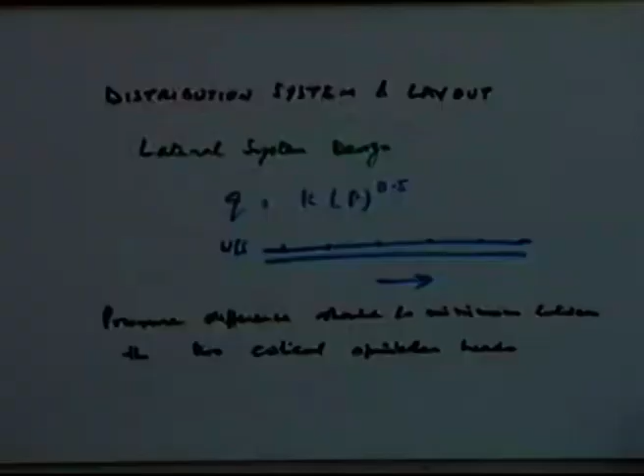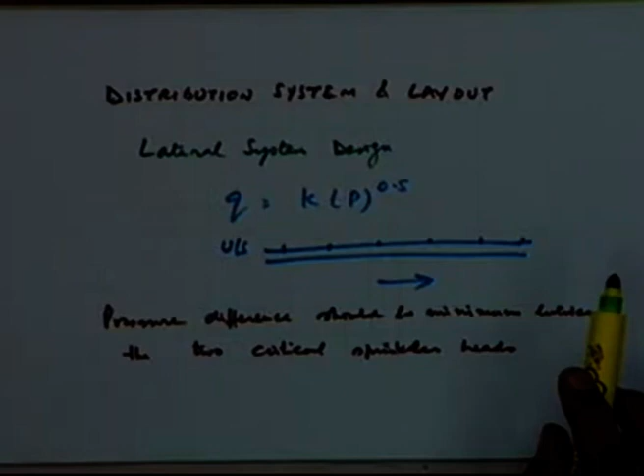We were discussing the distribution system and the layout. We had started with the distribution system in terms of considering the lateral system design first to start with, and we had mentioned that so far we have been assuming that there is no difference in the discharge. We were only considering a single sprinkler head, but when we take the total lateral, it is not possible to have uniform discharge from one sprinkler to another, because the discharge is reducing as you go down the lateral, and the pressure is also reducing due to losses incurring on the way as you travel down the lateral.

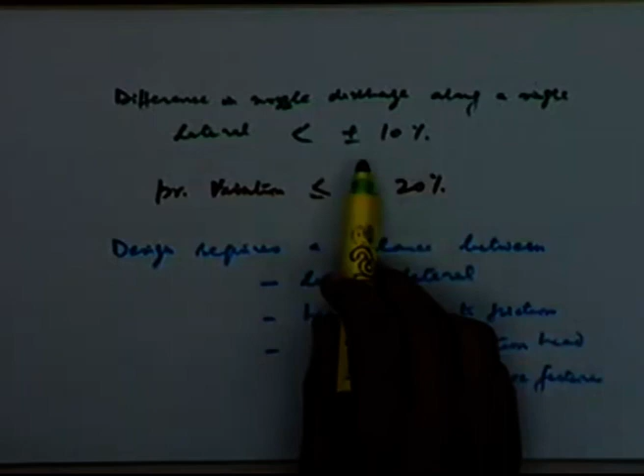Now, from the point of view of the design, since it is certain that you cannot keep a uniform pressure in the lateral, there will be some variation in the pressure as well as in the discharge, because both are related. The acceptable limits used for design are that the difference in nozzle discharge along a single lateral should be less than plus minus 10%, or in terms of pressure variation should be less than plus minus 20%. That is the limiting range given.

So you have to design your distribution system in such a manner that you are within these ranges, and that is the reason you will have to go in for a trade-off between some of the parameters which are within your permissible range, in terms of the situation, the environment, and the parameters which are flexible.

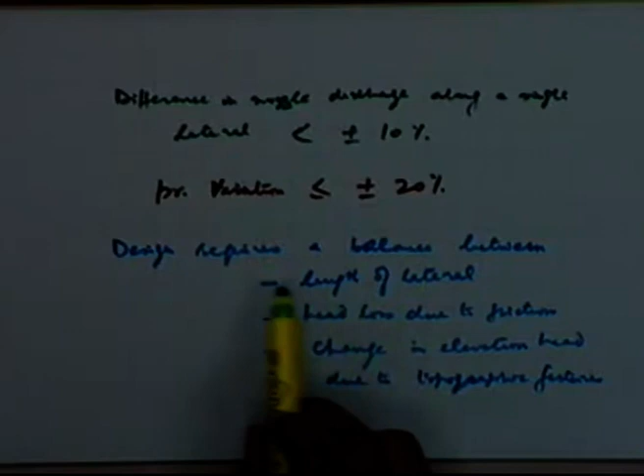In general, you have the balance between the length of the lateral. If the length of the lateral is flexible, you have the option to reduce or increase the length of the laterals. That is one parameter which you can manipulate or work on.

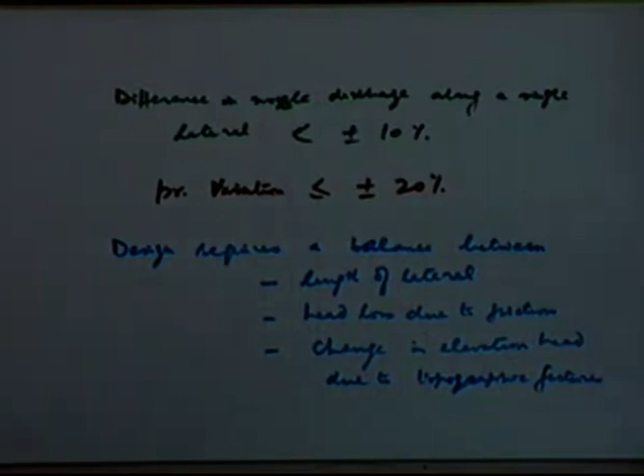The design will also require the balance between the head loss due to friction. You will have to consider the head loss due to friction, and incorporate the change in elevation due to topographic features. The advantage or disadvantage due to topographic features has to be exploited. In some cases, the prevailing slopes can be exploited to gain some head, which can compensate the loss due to friction.

So we'll look into those aspects when we go in for the layout, how the network, how the distribution system should be laid out. That is where we'll exploit the topographic features, and we'll set some thumb rules or guidelines which can be used for a proper layout, exploiting the natural features prevailing in that particular location.

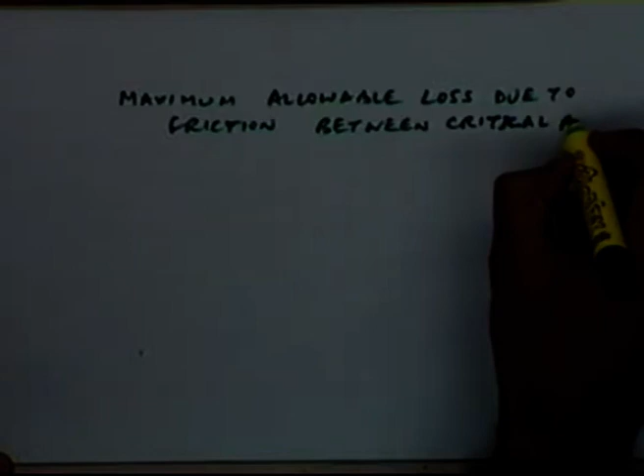Let's look at the maximum allowable loss due to friction between critical points, or between critical sprinklers on a lateral.

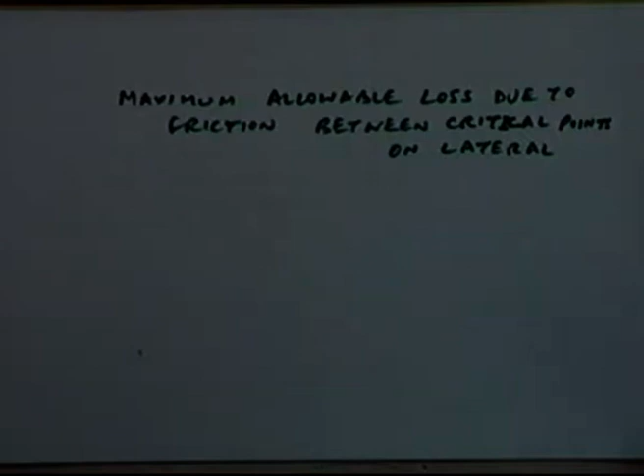First of all, before we go in for the expression, it is important to know which are the critical points. If you take a lateral, in normal circumstances, the first sprinkler and the last sprinkler will give you the two critical points, provided the lateral is laid on a uniform slope. In that case, the pressure difference between the first and last sprinkler will be the maximum.

But there can be situations where some other two sprinklers give you the critical points. This can happen where the lateral is laid on a non-uniform slope, where there can be a rise or fall of the natural slope. In that case, some other sprinkler position can be critical, because the differences made due to the elevation difference will make a major change in the overall pressure available at that location, which can be much higher than at a sprinkler even farther away.

So from the design purpose, that particular in-between sprinkler can also be a critical sprinkler, because you are designing for the extremes. Whichever is the extreme case, you will have to first select the extreme sprinkler head creating the maximum difference. That has to be picked up.

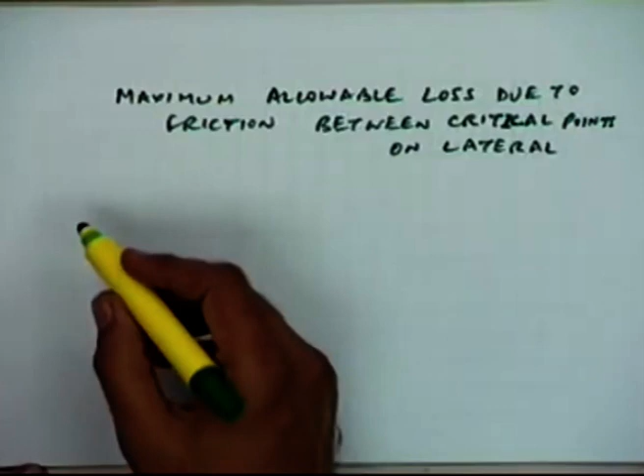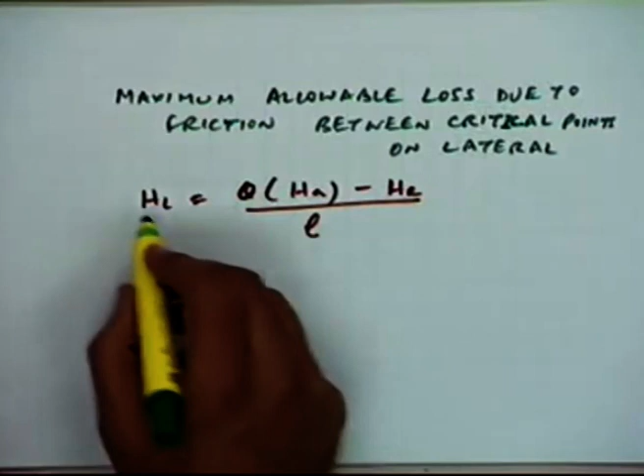So when you look at the maximum allowable loss due to friction between the critical points on the lateral, you are trying to cater to that critical difference on a particular lateral, and that is given by this expression, where HL is the maximum allowable loss due to friction between the critical points, expressed in meters per meter.

Theta is the maximum allowable pressure difference. This is given in fraction.

Earlier we said the pressure difference should be less than or equal to 20%. What is the exact value? That is what theta is. What is the proportion, the maximum allowable pressure difference which can be used or which is acceptable? That is theta.

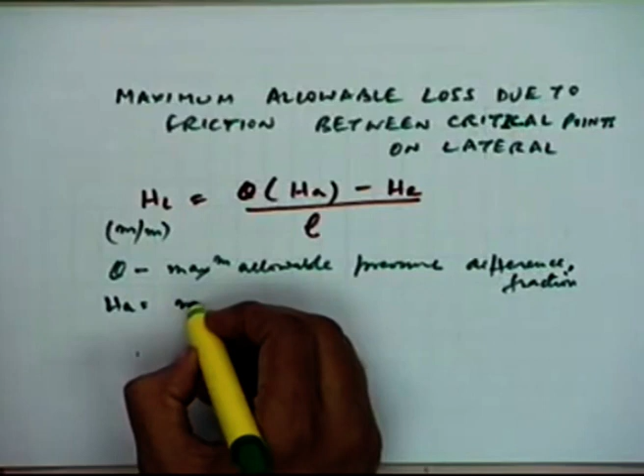HA is the nozzle design pressure, expressed in meters, and HE is the increase in elevation in the direction of flow.

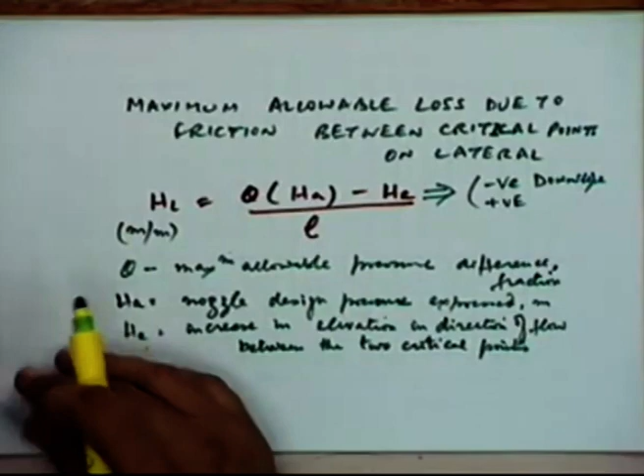This increase in elevation has to be taken between the two critical points. This HE can be negative or positive. If you have a downslope it is negative, if you have an upslope it is positive.

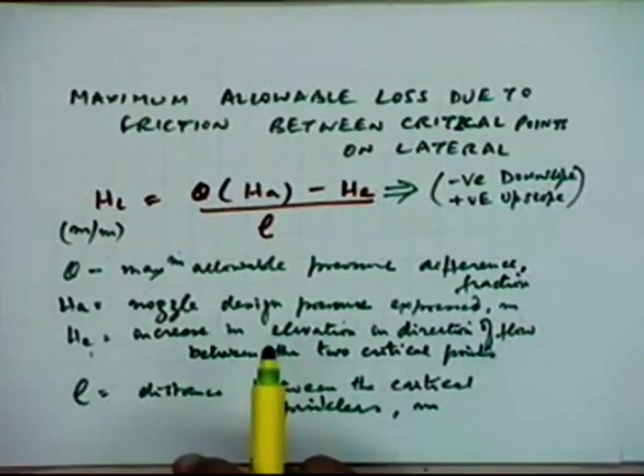And L is the distance between the critical sprinklers, in meters. Now this gives you the maximum allowable friction loss which is permissible for this particular lateral, but the actual can be much different, and the actual loss is - this is only the permissible value.

You would like to be much within, or on the conservative side. You can have this as the maximum value, but to have a better design, reduced cost, and a design which is more effective, you would like to be much below this. So you have to now compute the actuals. This is only the permissible value, the upper limit which we have computed. To find the actuals, you have to take the help of the hydraulics of the laterals.

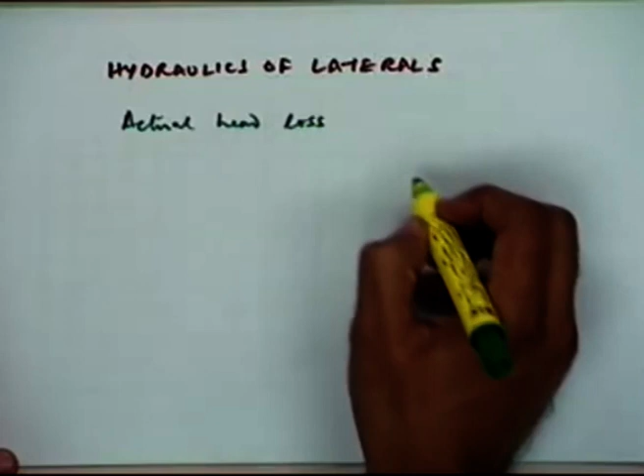As we know, dealing with the flow in pipes, the actual head loss is a function of the flow rate and the diameter of the pipe. Besides that, there are other characteristics like roughness and all those things, but these are the two major parameters which will decide the actual head loss.

Now the trouble is, if we have uniform conventional pipes where the flow takes place without any loss of discharge, we have well-defined formulas, many of which can be used to find the head loss. The problem comes when we have this sprinkler system, where there is loss of water and the volumetric flow rate decreases as you go along the lateral. So when you have that situation, those formulae are no longer applicable as they are, because the assumption there is that there is no loss of flow.

So some approximations and assumptions have been incorporated to use the same formulae available in hydraulics literature, using some additional information or empirical relationships to convert those formulas, or make them valid for the present case where we have loss of discharge along the lateral. That is what we take advantage of. The expressions we are going to consider use a known formula and then provide a correction factor to make them valid for the present case.

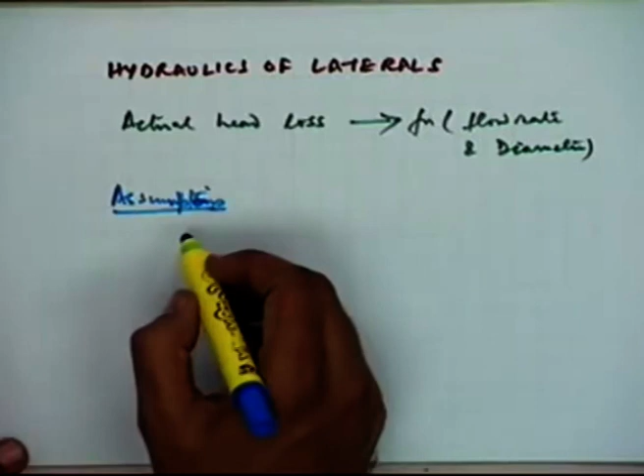So in the present analysis, the assumptions made are that sprinklers are spaced at an equal spacing of SL, which is true because that is what we resort to. We don't change the spacing. Discharges are assumed the same for each nozzle - this is not true, we know that. That is why, from the uniformity coefficient point of view, or uniformity of distribution of water, we try to restrict ourselves within a range of less than 10%.

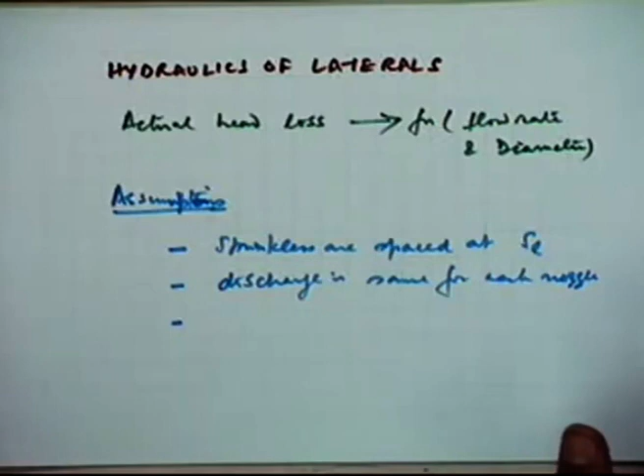But for these subsequent formulae, we are assuming that the discharge is the same for each nozzle, and also that the total flow in the lateral is the discharge through nozzles only - there is no other loss.

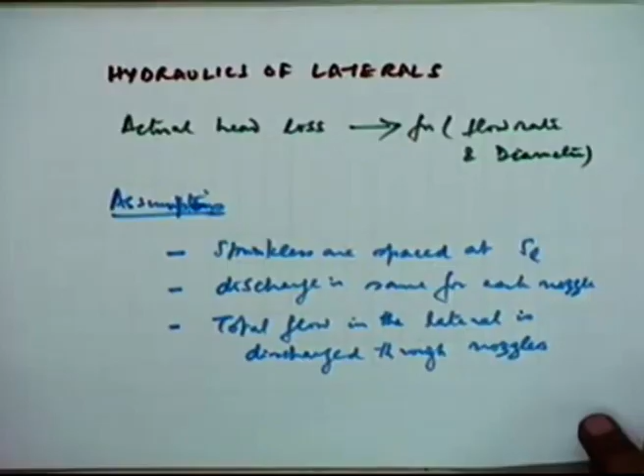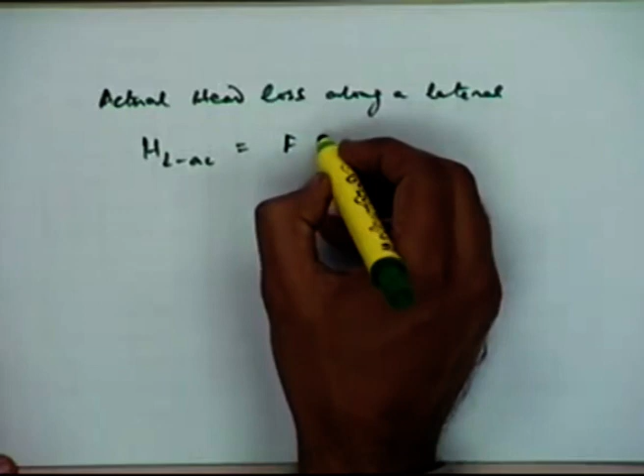So the actual head loss along a lateral is expressed as: the actual head loss is some factor F into head loss for an equivalent pipe.

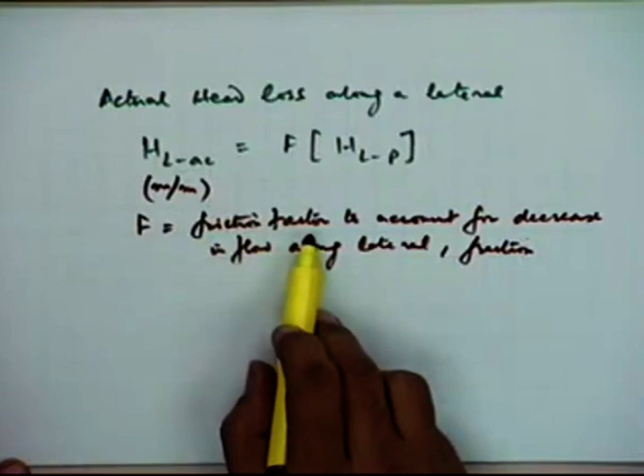Let's see, this is the actual head loss due to friction in meters per meter, and F is the friction factor to account for a decrease in flow along the lateral, and this is expressed as a fraction. That is what we have said, that there will be a factor which will be applied onto the head loss.

This HLP is the equivalent head loss due to friction in the pipe without sprinklers. So if there are no sprinklers put on the pipe, how much will be the head loss in meters per meter.

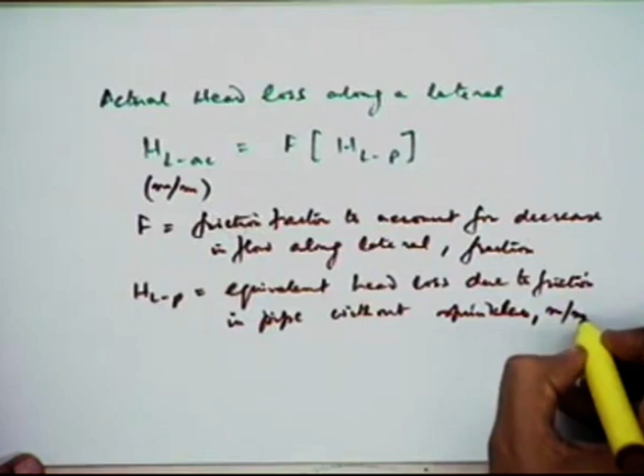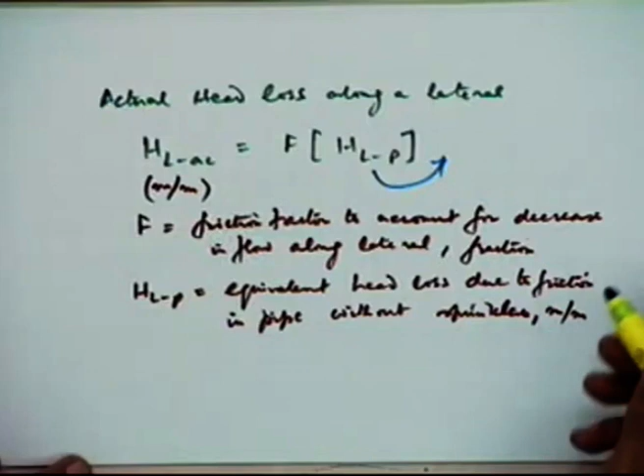For this head loss, for the computation of HLP, you must have in your course on hydraulics come across many formulae which are available.

These are the formula given by Scobey, there is the Hazen-Williams formula, and there is another one, the Darcy-Weisbach formula. These are different formulae. Any one can be used for finding out how much is the head loss due to friction in the pipe if you don't have any sprinklers.

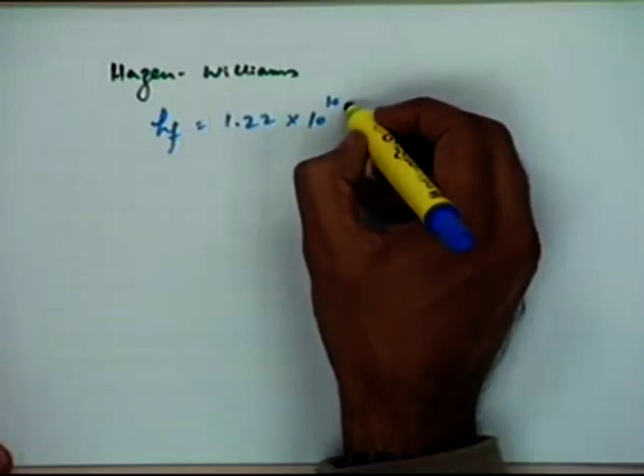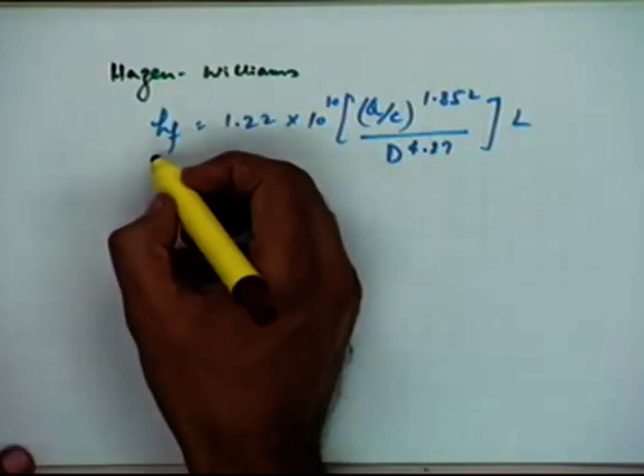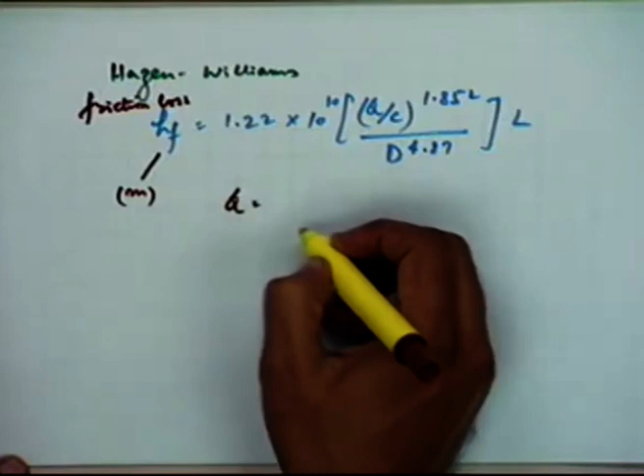This is the friction loss, HF, for the total length of the pipe in meters, and Q is the flow rate or the discharge in liters per second.

C is the Hazen-Williams friction coefficient, D is the inside pipe diameter in millimeters, and L is the length of the pipe.

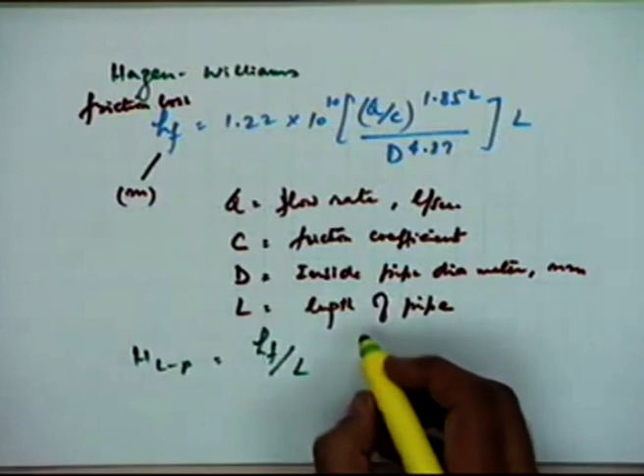Now here, the HLP which we have used in the previous expression, that will basically be HF divided by L, which will give this in meters per meter, length of the pipe.

As far as the factor F is concerned, which we use for the sprinkler systems, Christiansen has given an expression for friction factor, which we are calling F.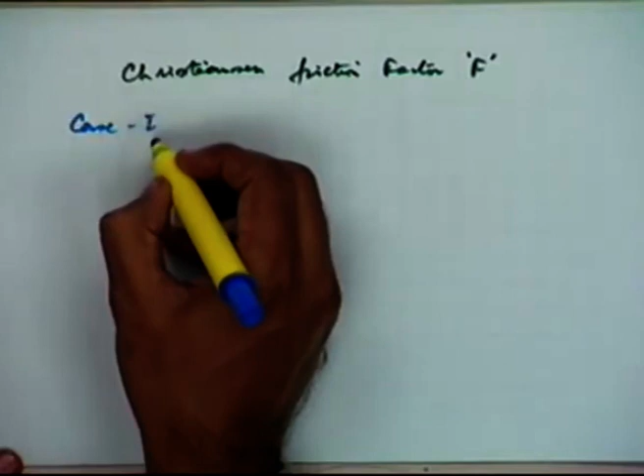He has used two cases. As this friction factor F changes with respect to the condition of how you have installed the sprinklers on the lateral, there are two options available. Sometimes you might install the first sprinkler head at half the interval, or half the SL. For example, if this is the main line and this is the lateral.

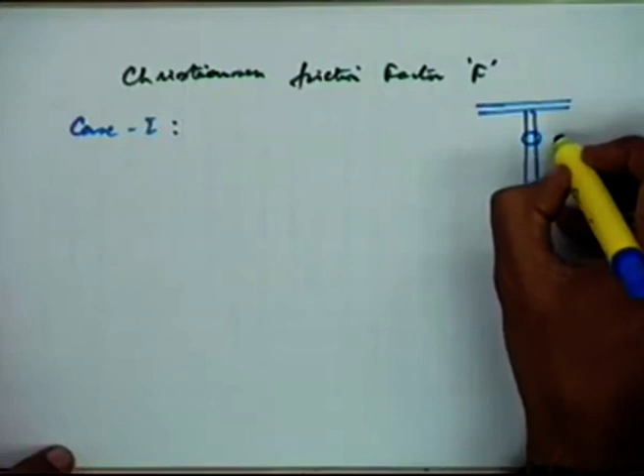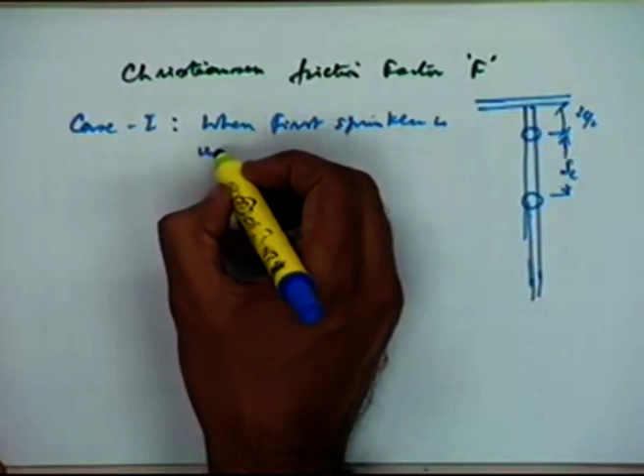Now, if this is your spacing on the lateral, and if you install the first sprinkler at half the lateral spacing, then you have one case. The other case is when you install it at one lateral spacing. So case 1 is when the first sprinkler is installed at distance SL from the main line.

So this is case 2 which we have shown here. In case 1, F is given as this expression.

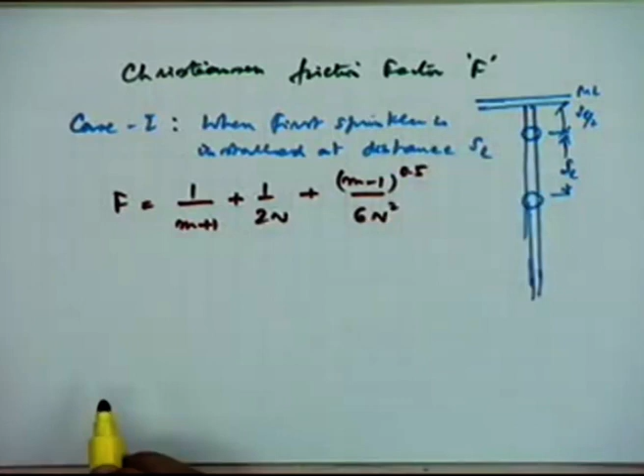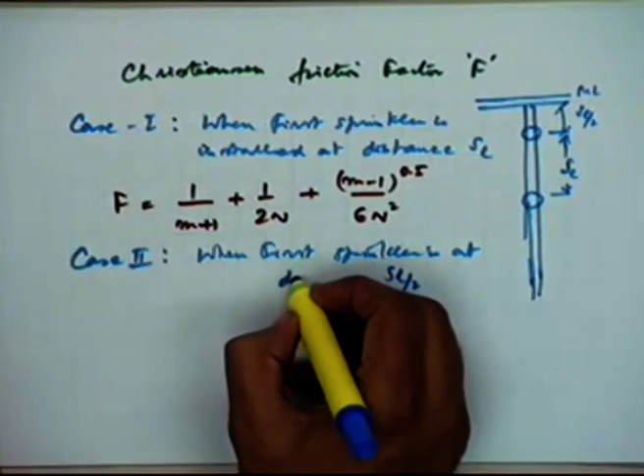When the first sprinkler is installed at a distance of one times the spacing, or at distance SL, that's case 1. Case 2 is when the first sprinkler is at distance SL by 2 from the main line. In that case, F is given as 2n over (2n minus 1) times [1 over (m plus 1) plus (m minus 1)^0.5 over 6n squared].

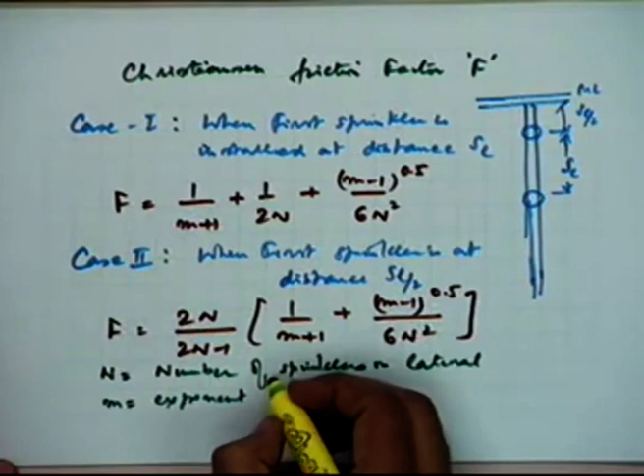And in these two expressions, n is the number of sprinklers on the lateral - the total number of sprinklers which have been installed on the lateral - and small m is the exponent on the velocity term.

In the friction head loss equation, in the present case we have used, this value of m will change from one formula to the other. In the present case, we have used the Hazen-Williams formula, for which the m value will be 1.852 - this is the value of the exponent used for Q by C. So for the Hazen-Williams formula, m will be 1.852.

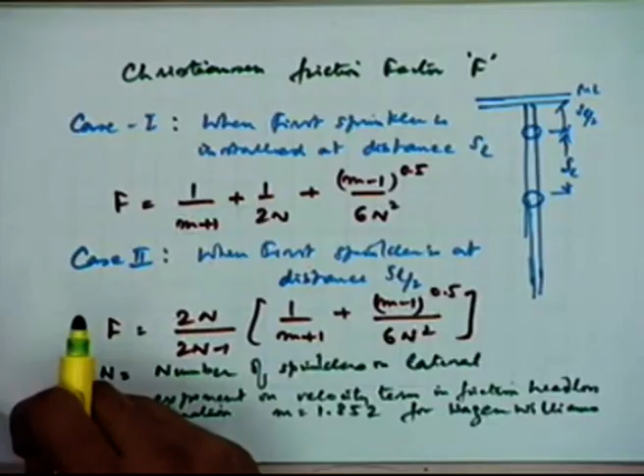So once you find out the value of F, you can then use this F value along with the friction loss from those known formulae, and you can find out how much is the actual head loss.

One more thing we must understand here: now that you have found out the actual head loss, you compare it with the permissible head loss, which we have already seen. That is the major item of the design in the case of lateral design.

But then if you have found out that the actual head loss is much more than the permissible head loss, what are the various options available to you? There is no restriction - there are different options available. You can either adjust the lengths, that's one way of looking at it, or you can change the diameters of the pipes.

There are many situations where you will find that the layout is almost fixed, where there are not many options when you look at the layout. With respect to the area where you want to install the system, the layout possibilities are maybe two different layouts which are quite close to optimum. Once that layout is fixed, you might not be able to have the option of changing the lengths, since the lengths will be restricted by the layout. You will only be left with the option of changing the sizes of the pipes. That is how you can look at the option of reducing the prevalent head loss.

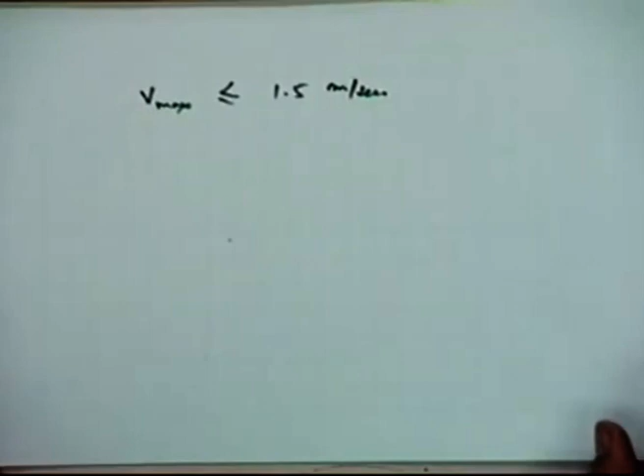You have two places where there will be a sudden change of direction of flow. One is when water comes from the main line and enters the lateral. The other is when water comes from the lateral and enters the riser pipe, and then comes to the sprinkler head. So from that criteria, to avoid situations where you have excessive loss, you try to restrict the maximum velocities to be less than this value. There is also another additional parameter which has to be looked into.

Next, let's come out now and look at the lateral layouts. Having looked at how we look at the various losses which are prevalent, one way of reducing the loss, or keeping it within the permissible loss rate, is you can have a proper design of the layout. What are the possible layouts? We will look at some of them because you cannot possibly think of all the possible layouts which can be adopted by a user or by a designer, because it's a function of so many parameters.

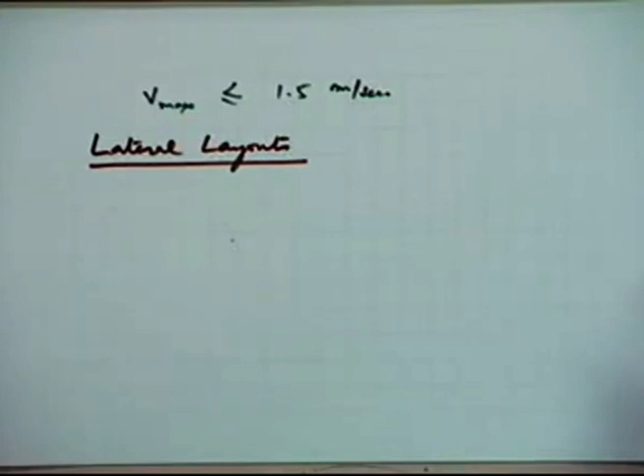The major thing which will decide this layout will be the topography of the area. So the topographies cannot be generalized. You will still try to look at some typical examples of these layouts, where it's totally dependent on the designer how he goes in for the actual layout. This will also be a function of what type of system he already has available, what are the lengths of the various pipelines available, what type of pump is already available. If you start with a fresh design, yes, you can have the choice on almost every component. But if you have some part of the equipment already available with you, then you will be constrained by that equipment, and you will try to check whether, if you use that equipment, you will be within the permissible limits or not.

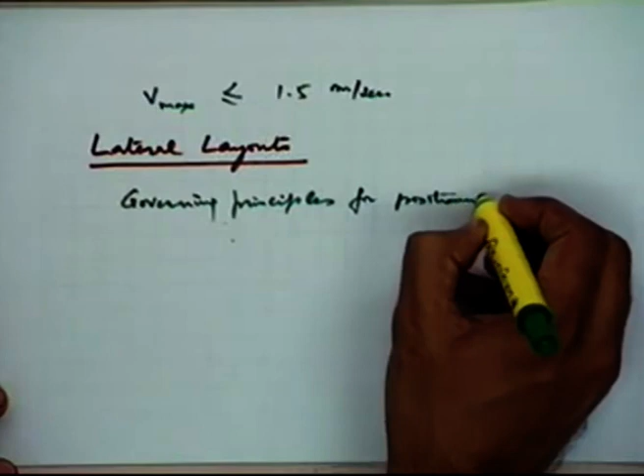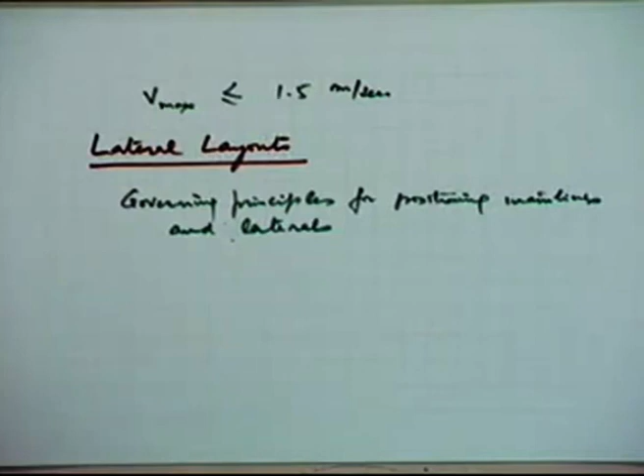The layouts, the governing principles for positioning main lines and laterals. Let's try to look first at what are the governing principles which should be kept in mind when you go in for the layout of the main lines and the laterals. Some of the important things are that you want to minimize the costs. That is a very important factor which must be considered, what is the layout which can give you the minimum cost.

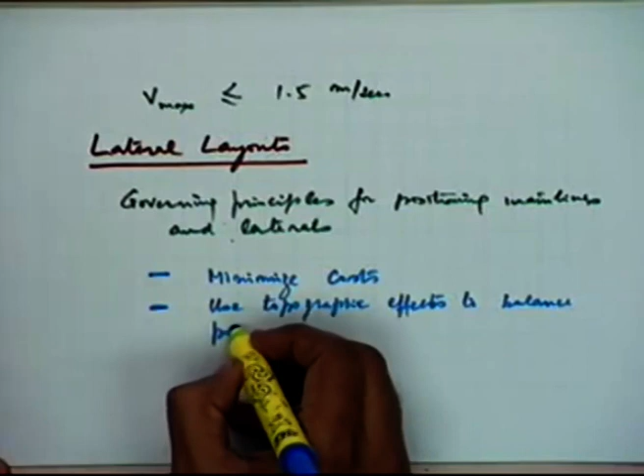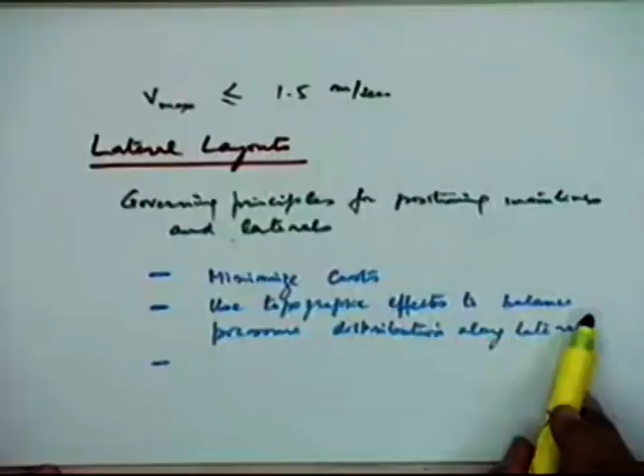You must use topographic effects to balance the pressure distribution along the lateral. For example, since you know that if you have a situation where you have a natural downslope available, and if you lay your lateral on that downslope, there will be some friction loss, some head loss due to friction as you go along the pipe, but this head loss can be compensated because of that downslope, which is the additional head you gain because of the downslope. So because of this compensation, over the total length of the lateral you can ensure that the pressure variation is minimized. In other words, if you can lay out your laterals on the downslopes wherever possible, you will gain in terms of uniformity of application. That is what we mean by using topographic effects to balance the pressure distribution along the laterals.

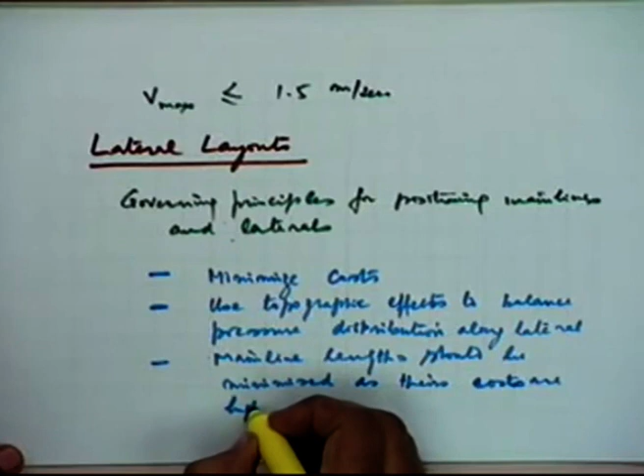But when it comes to the main line, the main line lengths should be minimized, as their costs are high. The costs of the main lines are much higher. So if you can reduce the length of the main line, there will be much more advantages.

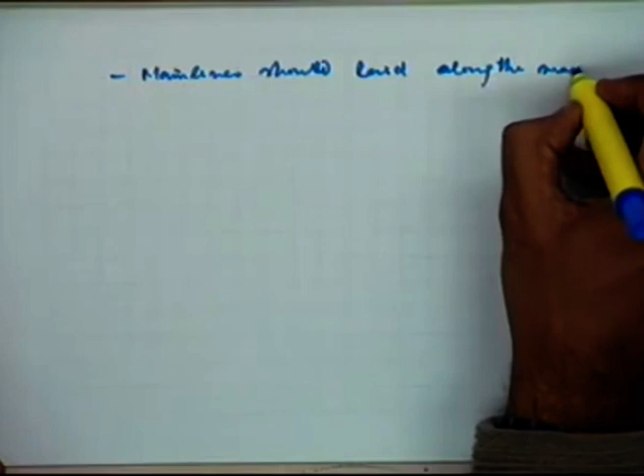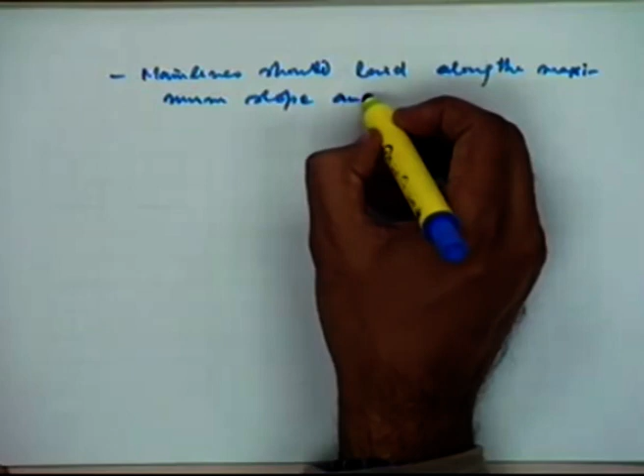Then there is another governing principle that wherever possible, the main lines should be laid along the maximum slope, and the laterals should run perpendicular to the main line in the direction of minimum slope.

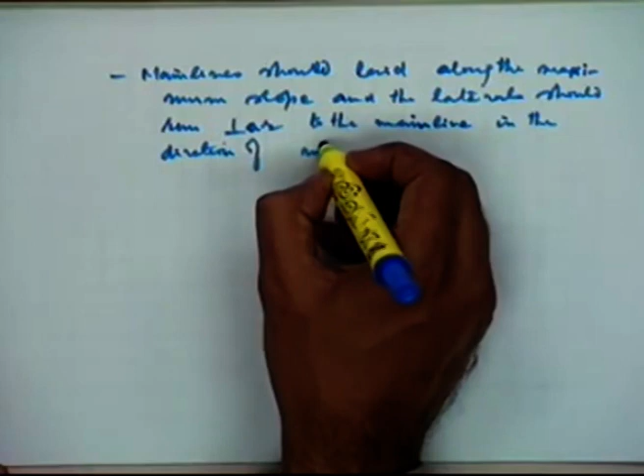Wherever you have the situation where you have the slope in both the directions, the main line should be laid on to the maximum slope, and then from there you will have the laterals going out along the slope in the other direction, which is not as excessive as the main line slope.

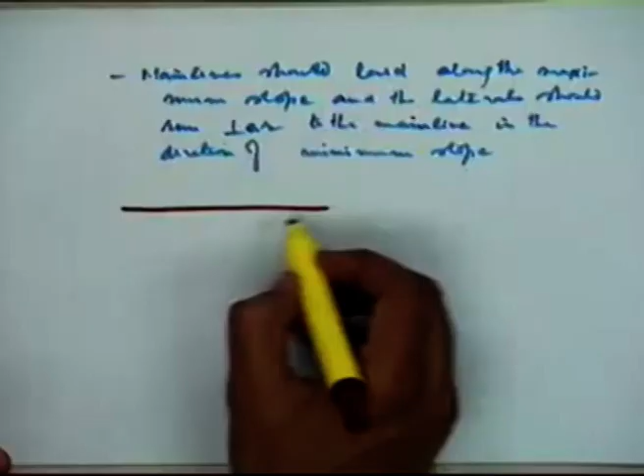Let's have some of the typical situations where you can look at what is possible. Let's take one field where you have quite a moderate slope. The slope is in this general direction.

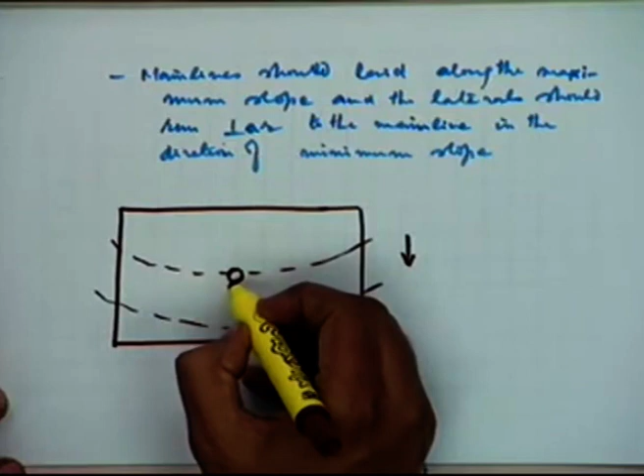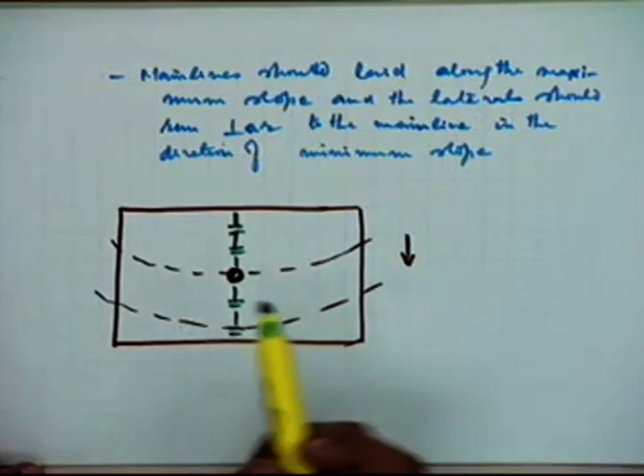You have the source of water. This is the source of water in the middle of the field. Now when the source of water is in the middle, you can, in this case, this is your maximum slope, and there is some slope in the other direction also. If you lay your main line along the slope,

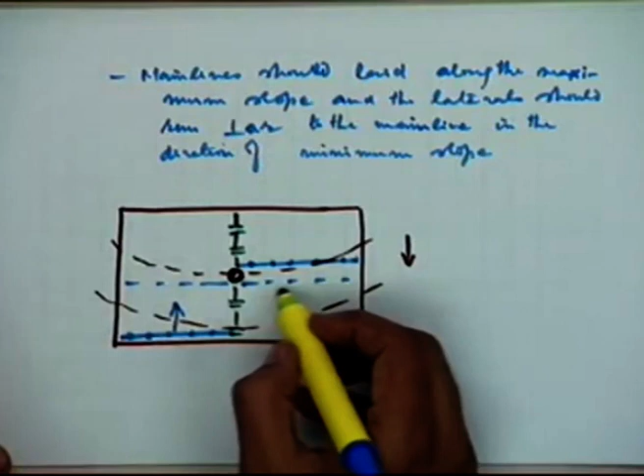you can run the laterals. You can have one lateral in this direction, this is one lateral, and there can be another lateral which is somewhere here. You have all these sprinkler heads put on the lateral. Now this lateral can be moved in this direction. It can cover the area up to this. Then you might bring the lateral to the other side of the area and move it down from there. Similarly, this lateral can move up, cover this area, and then from there can move down.

It depends how many laterals you want to utilize. In this case, only 2 laterals are being utilized. But then this is not the only way to look at it. You will also have to look at how much is the discharge which you are having in the sprinkler heads, how much time is available, how much time it will take to cover this total area.

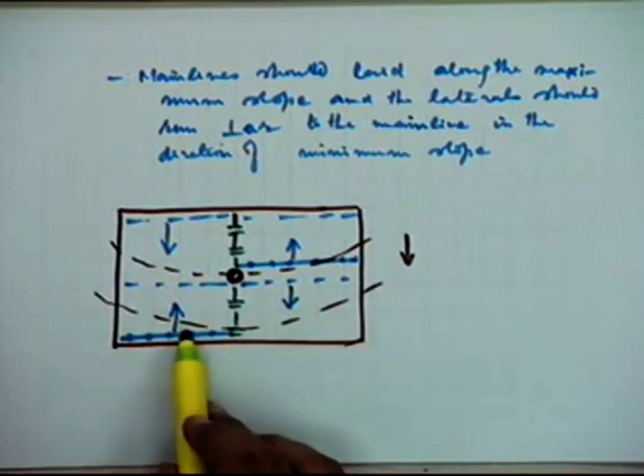All those things we have already seen, how they can be looked at while designing, but we are just looking at one option available. If you want to use only 2 laterals and you want to cover the whole area, if you find that the 2 laterals are not sufficient, you might go in for 2 more laterals, and 4 laterals will be there. You can have this one going here, there can be another one which is covering this area, and each one can cover 1/4 of the area.

Let's look at another situation where you have again the moderate slopes, but now in this particular case the source is not within the area, the source is outside, this is the source, and in this case again the general slope is that you have, this is the downslope.

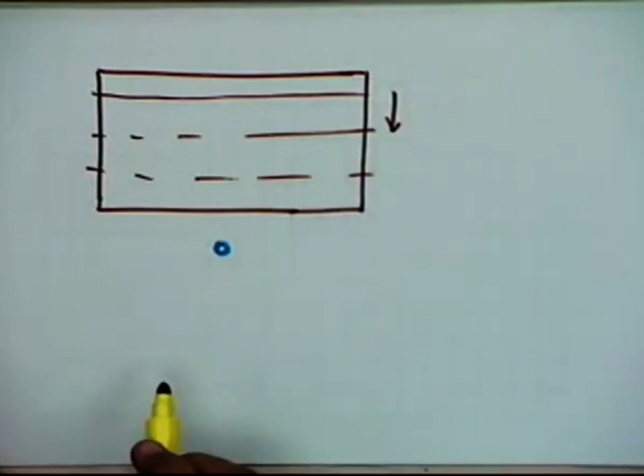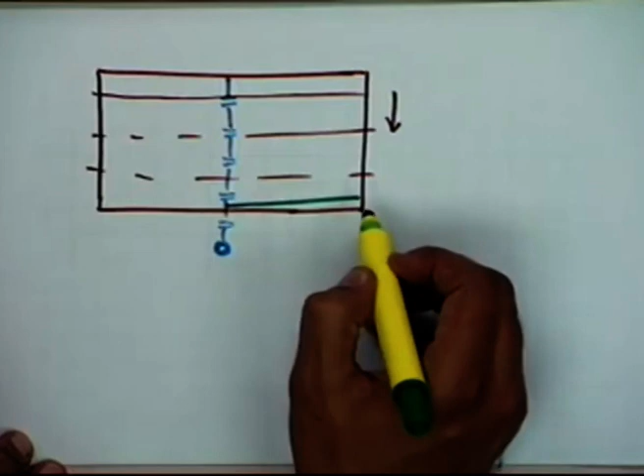You lay the main line in the middle of the field, and here now you can think of having laterals which are not just 2, again you can have more than 2 laterals, depends how many laterals you need to cover the whole area.

So one possibility can be that this lateral is moving in this direction, this lateral is moving in this direction, and after covering this area it might be covering some part of this area also, and this lateral is moving in this direction.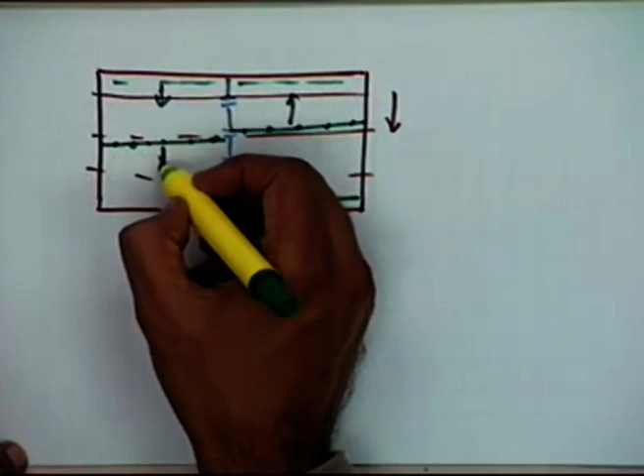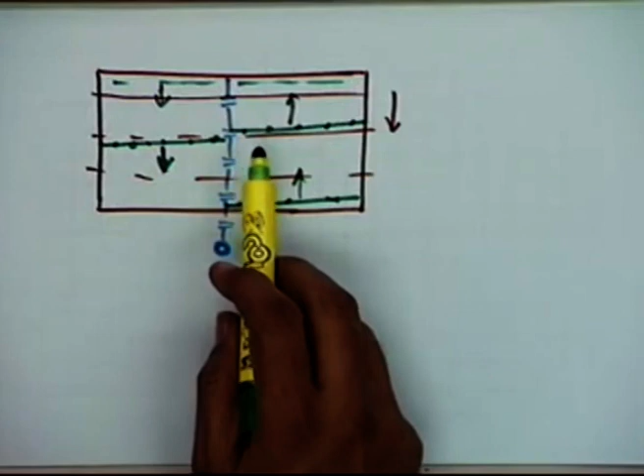The actual coverage, how many settings will be needed, that has to be known - how many settings will be required to cover the total area. That will be a function of what is the total length, what is the spacing between the laterals, and that will decide how many total number of settings will be required, because that has been decided on the basis of the overlaps. What overlaps are required, and then the number has to be found out from the point of view of how much time is available to the farmer or to the operator to cover that total area.

That is basically the total crux of the whole game of designing, because the operation and design, and moreover there is one more thing, that the operations can be different for different periods.

If you have the peak period which you are considering, the design will have to be done for the peak consumptive use period. But when you talk of operations in other periods, you might not use the same operation strategy, because at that time you might be in a position to wait longer. The irrigation interval can be much bigger than what is prevalent at the time of peak consumptive use rate.

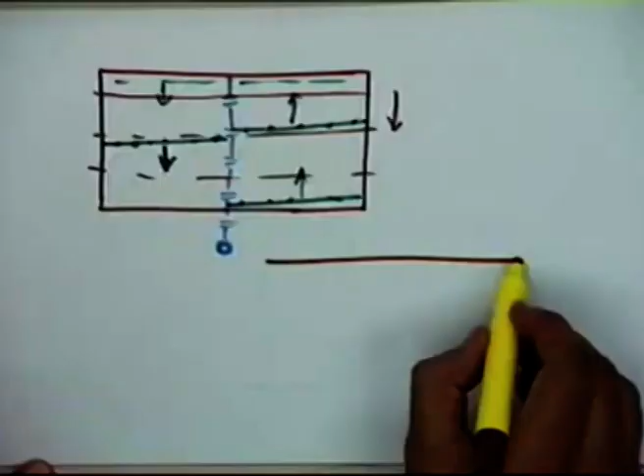Let's look at another situation where you have the area in which the main line is laid along one side of the field. In this case also, the area is of similar type, with a general slope in this direction.

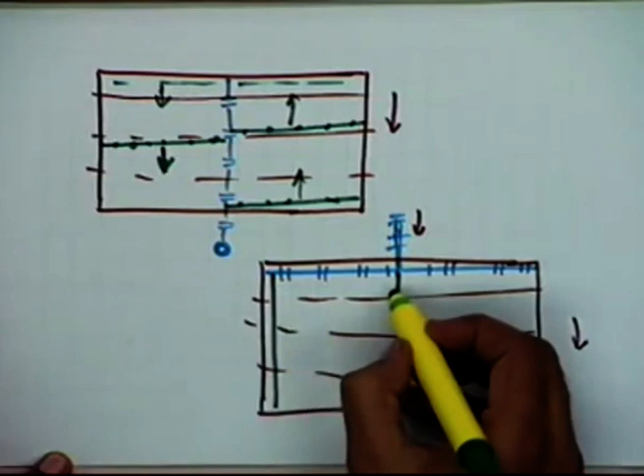In this particular case, your main line is coming from some other area and you want to cover this total field. The water supply is coming from this part of the main line. One possible way of running the laterals is that you have these two laterals, this one covering this part of the area and this one covering this part of the area.

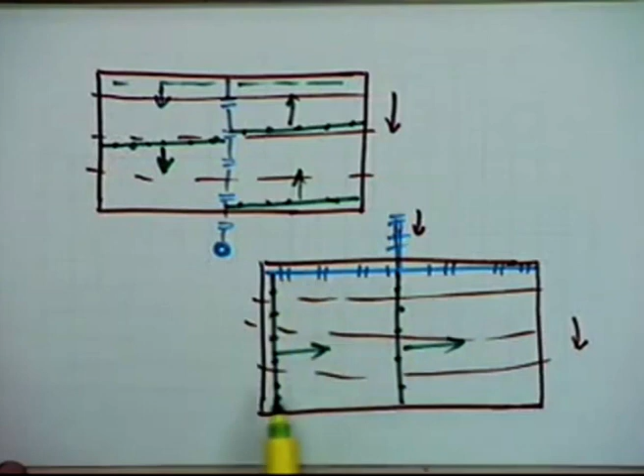Now in this case, you might find that we are not adhering to the general guidelines we gave. We are using a pattern that does not lay the main line along the maximum slope, but along the top of the field, and then making use of the slope to compensate the pressure in the laterals. In this case, the uniformity can be much better, and that is the major reason you are utilizing this particular layout.

Let's take another situation where you have an area where the slope is something like this. This is the general slope, this is the downslope. These are the points of higher elevation, and these are the points of lower elevation.

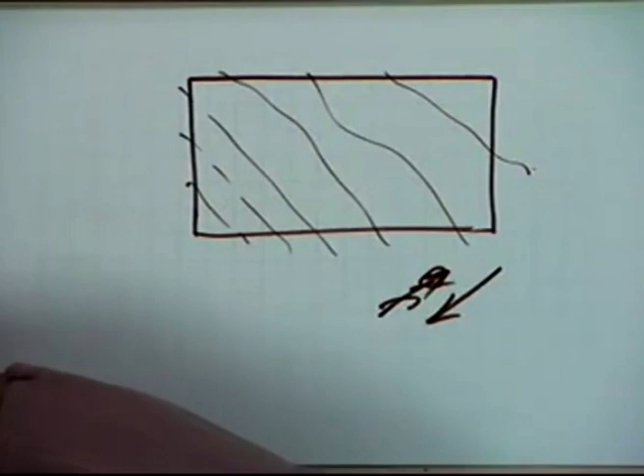In this case, the main line is going along here, this is the main line, and then it is covering two sides of the field.

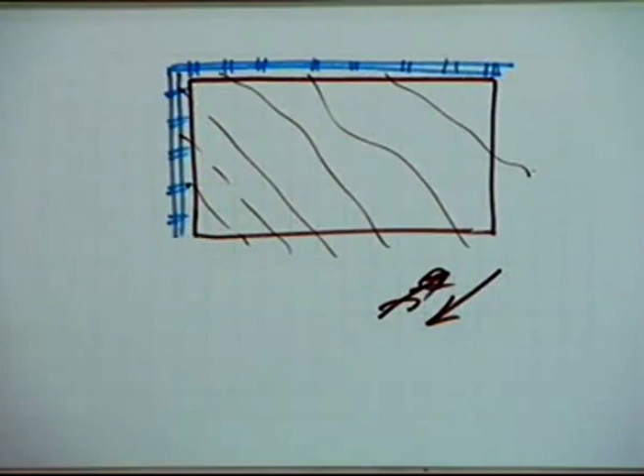In this particular situation, if this is the point of supply, if the pressure which is prevailing here at this location, as you go up, your pressure requirement or head requirement increases. There are more losses taking place, and it might happen that by the time you come to this point, the pressure requirement is much excessive.

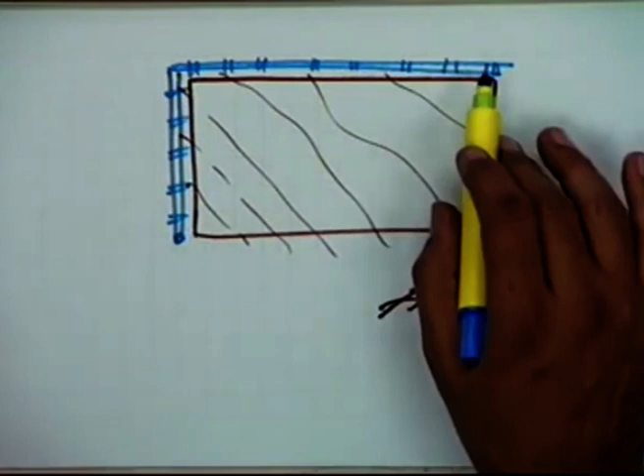The total pressure requirement will become too much. Now the problem is that for the overall main line, if you require a reasonable pressure here at the last point of the main line, and this is moving upslope, then the pressure requirement here will be very high. Because of that, the pressure availability has to be very high here. That might create a situation where pressures here are within range, but pressures in this zone become very excessive compared to what is required. That is another problem: if you try to cater to the pressures of the remote areas, the pressure just near the pump becomes highly excessive, much more than desirable.

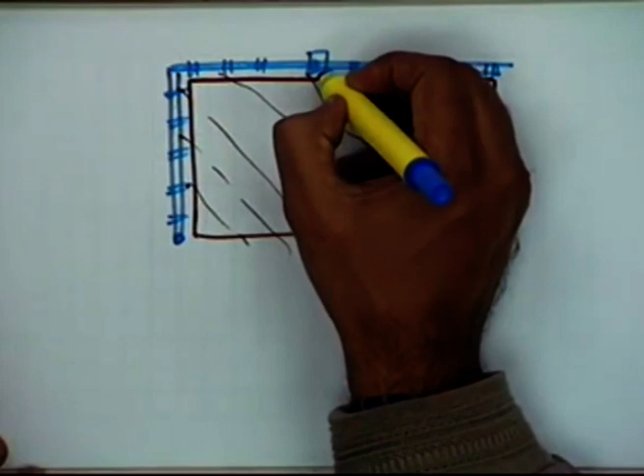So you will have to either go in for pressure regulators at each junction of the main line with the lateral, which is a very expensive affair, or there is another way out: you go in for boosters. One pump supplies water to this segment of the pipe, and you have a booster pump here which takes care of the remaining portion of the main line. By that, you don't have to spend extra money on pressure regulators to keep pressures in the segment nearer the pump within the permissible range for the laterals.

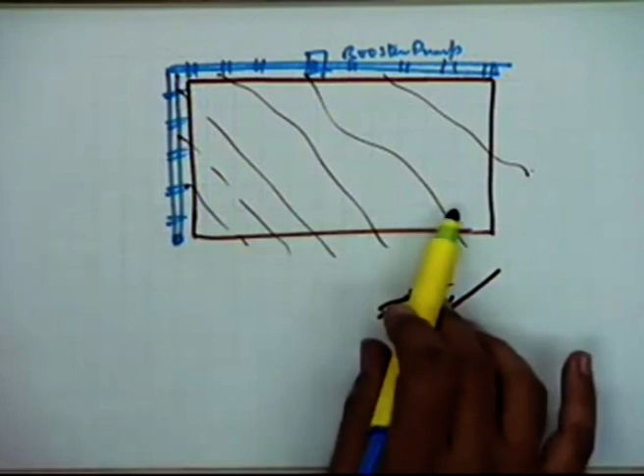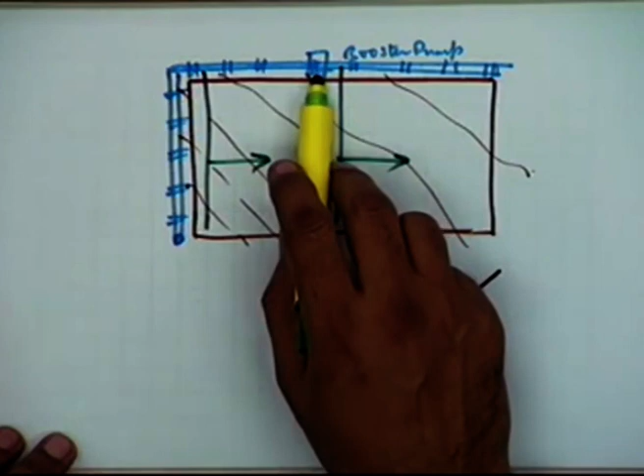In this case, you can have the movement of the laterals in this manner: one lateral here and one lateral here, this moving in this direction, this moving in this direction. But now there is this booster pump providing the pressure requirement in this section of the main line.